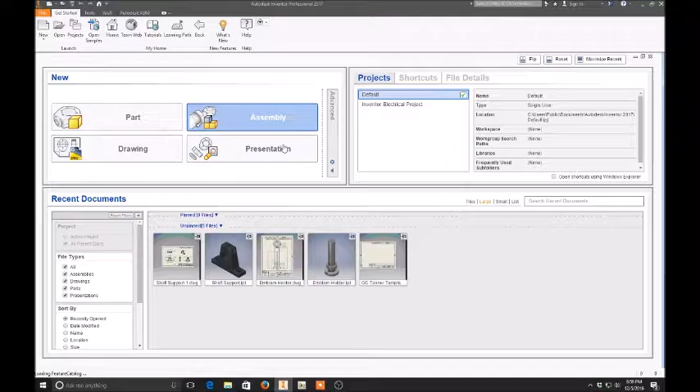The biggest thing to know for assemblies is really just constraining parts. There's two types of constraints. If we go over here to assemble, you have joint and constrain right here. Once we have a couple parts placed, we'll actually be able to use those buttons. But for this video, we're only going to be doing the constrain button.

So start with place. Find the part that you need to place. I will send these parts out so you have access to these parts along with the video. You should have an email with these three parts attached in it. We'll start with the foam press collar. Click open, and we could just right click and say place grounded at origin.

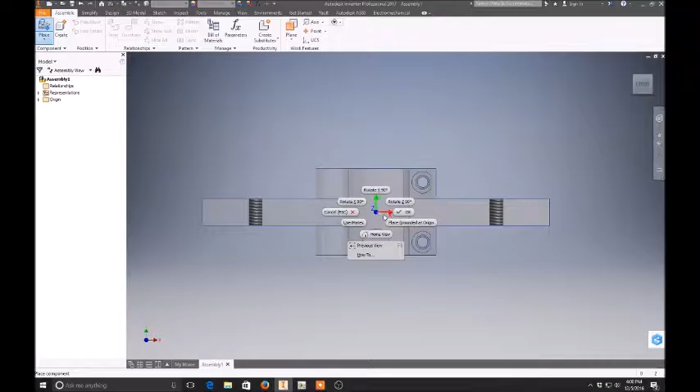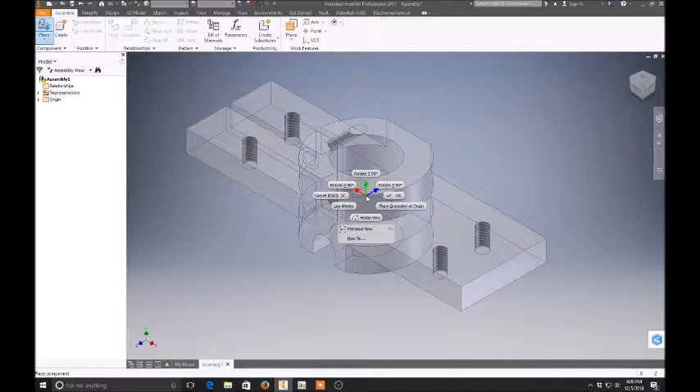However, I want to flip the part around. You can't really see it right here. If I click on home, you get a little bit of an isometric view. I can't really point at it because my cursor is attached to it, but you can see the two holes on the far side. I would like those to be facing me, so I just right click and say rotate Y 90 degrees. I do it twice to rotate 180 degrees. That looks good right there. So I right click, say place grounded at origin, and now we're good.

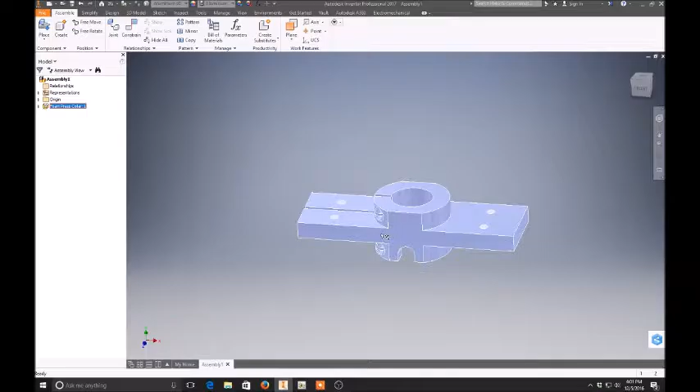And if you did not rotate the part around, that is fine. You can just have the part rotate the other way, or we can fix it other ways as well. So that's our base part right here. You'll notice that it has that thumbtack on it. That means it is grounded, and grounded just means it's fixed where it's at right now.

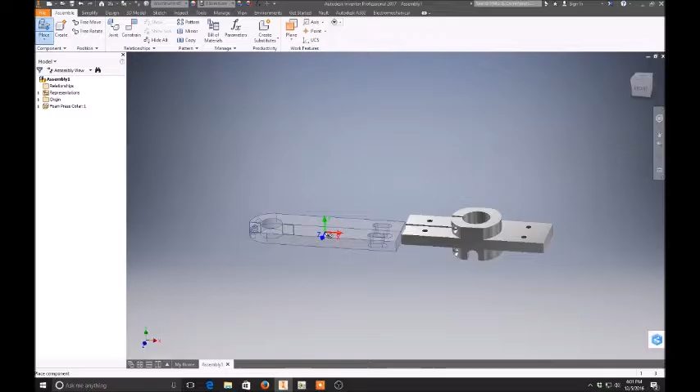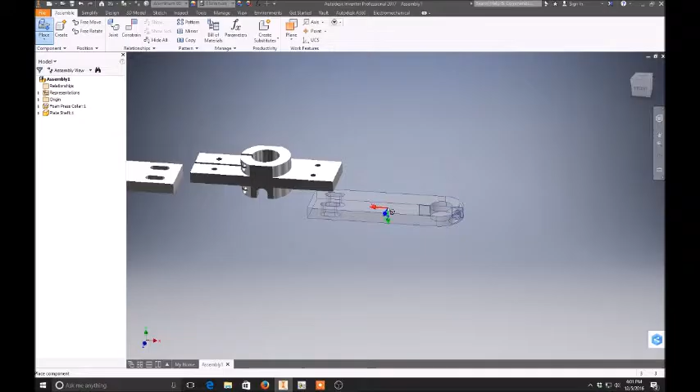So now I will place this plate shaft here. I'm going to place two of them like this, so just one right here and one right here. However, I'm going to rotate it 180 degrees, and then I'm going to rotate the X as well. So now the counter bore is facing us, so we want both counter bores on the same side. Okay, now we just start constraining.

So maybe let me give a little bit of intro to this. With the constraint right here, we have 5 basic constraints. More than 90% of the time you will only use mate and insert. Mate just makes two faces align with each other, and you can either have them opposed or both going the same way. And the same goes with insert, except with insert you have two lines that line up, typically center lines of cylindrical features.

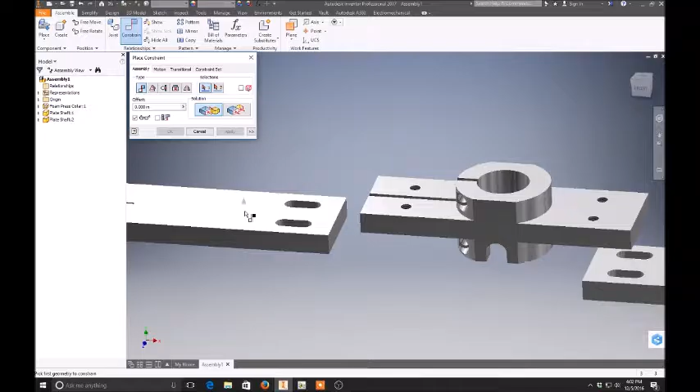But we'll start with the mate. Click on this surface. You can see there's a little arrow on my surface saying which way it is pointing. Since we're using this one, both arrows are going to be pointing away from each other once they constrain. Another note: make sure you always click on the part that is moving first, and the part it's being constrained to second. So I say apply.

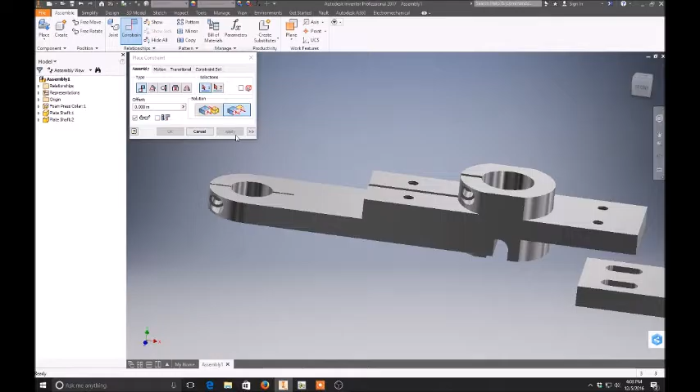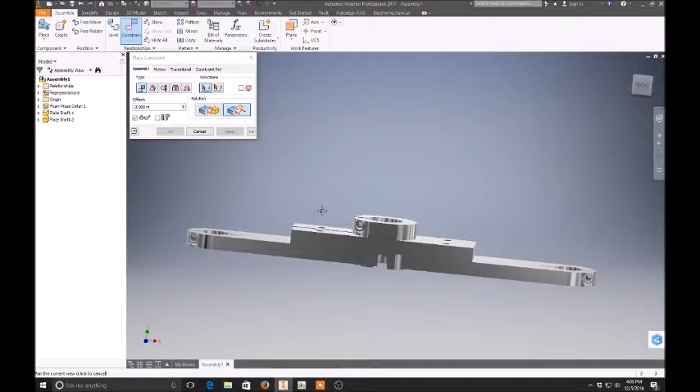Next, I'm going to do flush. I'm going to make this flush with this surface here. I'll say apply. And let's do the same thing on this one. Change it to mate. Mate those two surfaces. Apply, and then flush. Okay, so now those surfaces are all flush with each other. I'll say apply, and I'll cancel real quick. So now we can move these independently of each other.

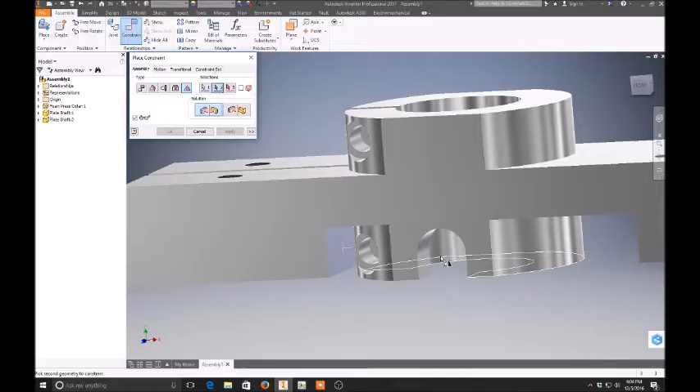One more constraint that we should do real quick is a symmetrical constraint. I want these two faces symmetrical to each other. So I just click on both these faces; this is your first selection, second selection, then the third thing I click on is the symmetry plane. You can do a few things.

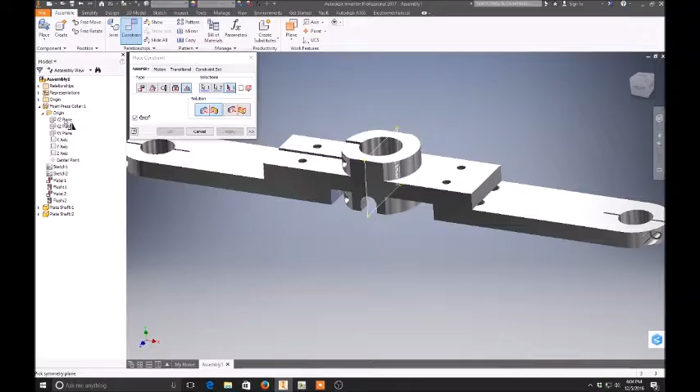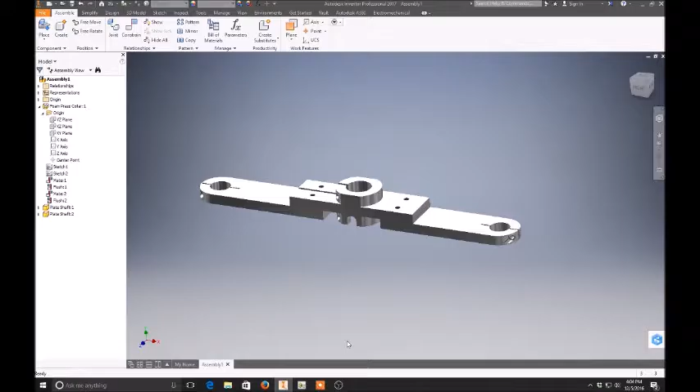You can click on the symmetry plane of the entire thing, or the symmetry plane of this actual foam press collar right here. Either one works. I'm just going to use the foam press collar plane. So click on the YZ plane. Now these two surfaces are symmetrical to each other. So I say apply. If we play with it, they're constrained to be symmetrical. Now I just need to find the actual distance between them, so I'm going to pause this and come back in a second.

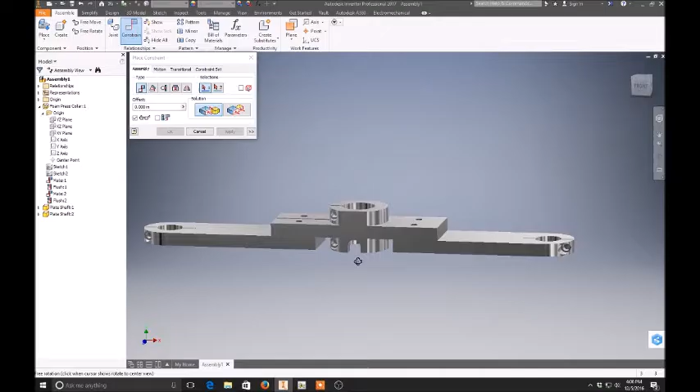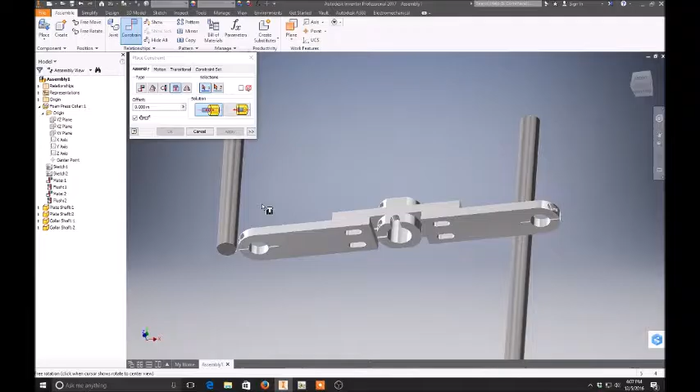Alrighty, I found the distance between this surface here and this surface here should be 2.625 inches. The way we do that, we do it as if we were going to mate them. I click on both surfaces, and it automatically mates them together. But then I want an offset, which is basically adding some distance between the two mates. So I just do 2.625 there, and now they are 2.625 inches apart.

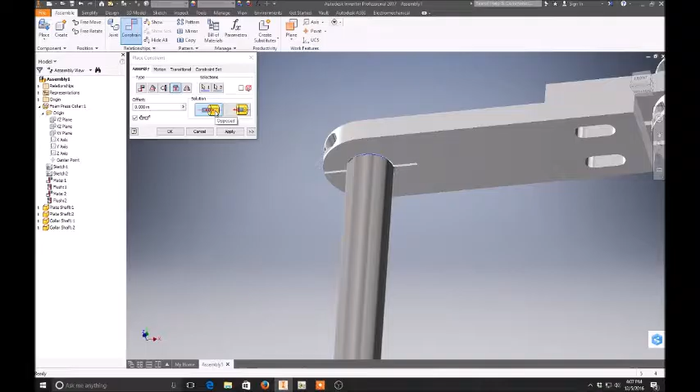And that looks good to me. Sometimes you'll have to put a minus sign on this because it's reversed for whatever reason, but we're good here. So I'll just say OK. And now those parts are fixed, and it looks like they are in the right spot. So we are good to go. Next thing I'll do is place the collar shaft.

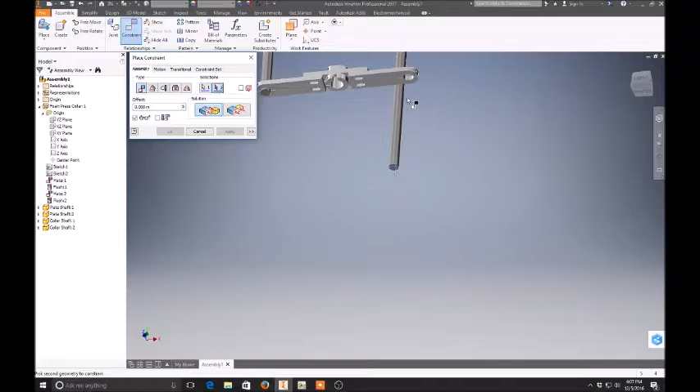So I'll place in two of those, one about there and there. Okay, and then I will go back to constraint, and this time I'm going to use insert. I always click on the part that's moving first, so I'm going to click on this one and make sure. Sometimes you have to be a little careful, like on chamfers or something, that you're clicking on the correct surface. It doesn't really matter in this case, but I want to click on the bottom surface there,

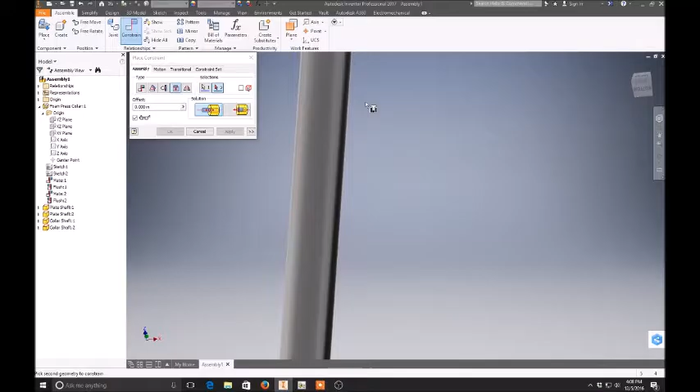and then I'll click here. And since I had the opposed one on, it makes it so the two arrows are pointing other ways. I want to change that to aligned, and I'm going to offset it by 1/4 inch, and actually minus 1/4 inch. That looks good to me. I'll just apply, and I'll do the same thing over here. And we could have mirrored it like I did in the demonstration earlier today.

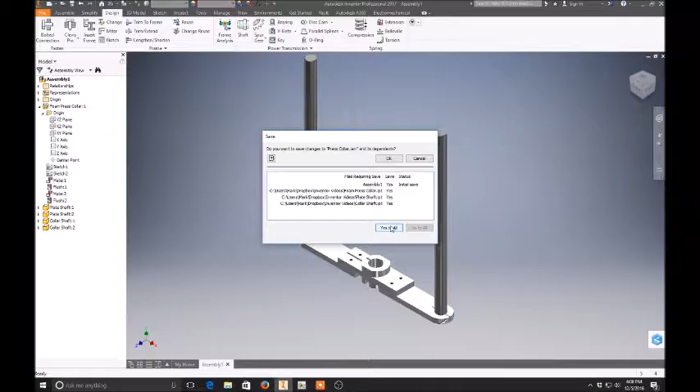Something didn't go right. Let's just cancel and try that again. So I'll click here. Oh, I forgot to click on insert. And click here. Okay. Make it aligned, and I'll offset by minus 0.25. Excellent. Okay, so now we're assembled. We just need to add in the bolts. So come over here to the design tab and click on bolted connection.

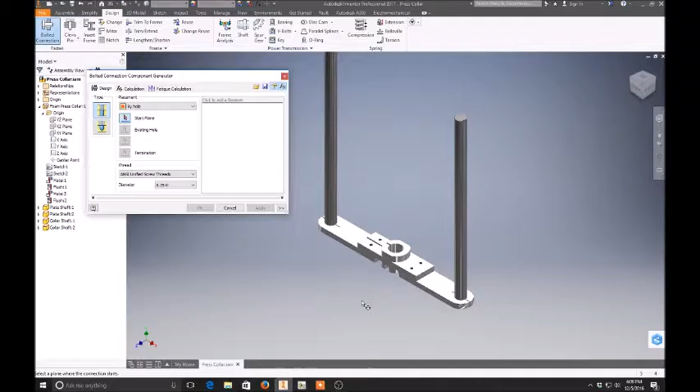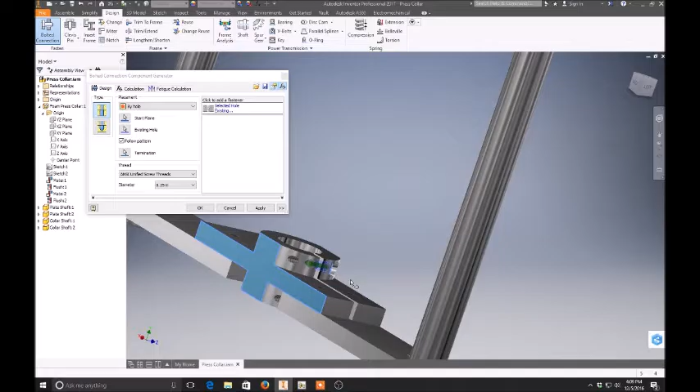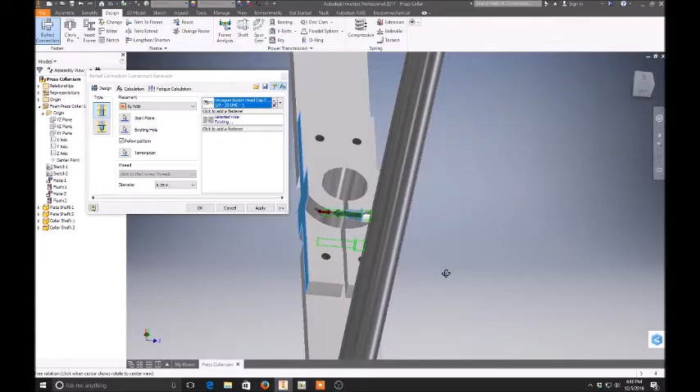Okay, I need to save the assembly first, and I'm going to call it press collar. And I'm going to say yes to all, since I haven't saved these on this computer yet, so I'll just say OK. It's current release. So now we'll wait for that to fully save, and it opens up the bolted connection component generator box. Make sure this is on by hole, and I actually haven't used this with 2017 yet, so hopefully everything is basically the same.

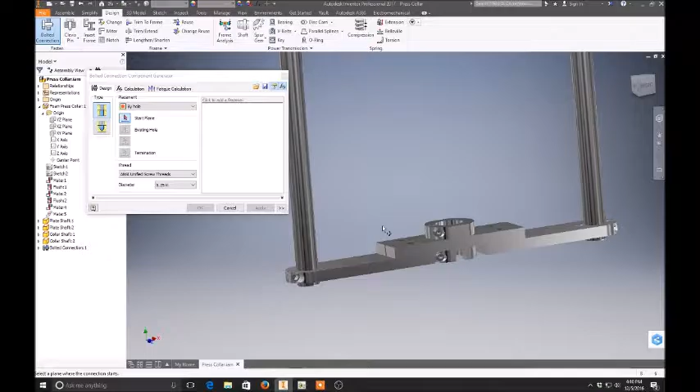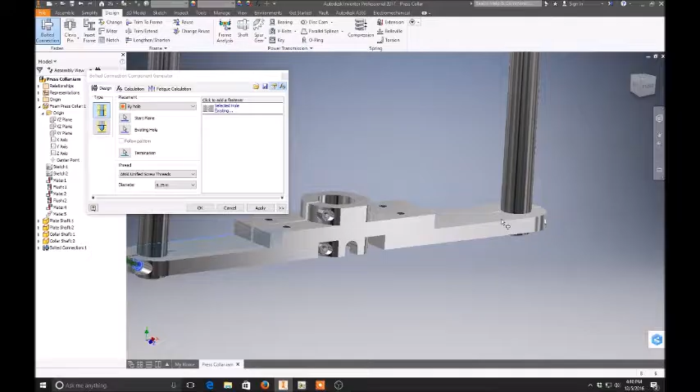We're going to start by putting bolts in these two holes. So click on the start plane, click on this hole, follow pattern, I'll click on that, and then termination, I'll have it terminate on this plane here. Try that again. There we go. And I want a 1/4 inch bolt. So I clicked on that bar to open up the fasteners. I click that drop down menu, click on socket head bolts. I like to do hexagon socket head cap screw. And the length looks good to me. It's a 1-inch bolt. So now I'll just say apply.

Okay, it's asking me where I want to save it. That looks like as good a spot as any. Okay, so now I have those bolts. So 2 down, 6 to go. I'll start on this one over here. So I click on the start plane, existing hole, and termination over here. If I wanted to say follow pattern, it's grayed out because there's no pattern to follow. These are 2 separate parts, so it doesn't like doing the follow pattern on those.

Okay, it's 1/4 inch. Add a fastener. We're going to change it to socket head bolts, hexagon socket head cap. Check the length. Looks fine to me. If we wanted to use another 1 inch long screw, we could do that. That kind of makes sense since we're using an inch screw there. That way we don't have to get that many different kinds of bolts. And I'll say OK. Yep, save it there.

And we could open up that dialog box and do the same thing over here. It's not necessarily a shortcut, just another way to do it. It might actually take longer, but you open the mirror. Click on this as the component, mirror plane. Make sure that's the right mirror plane. Yep. And it mirrored that bolt over there. Okay, it still wants to know a place to save it. So now I have my bolt over there, and it should be in the right spot and the same length. Now I just have the bolts on the bottom to do.